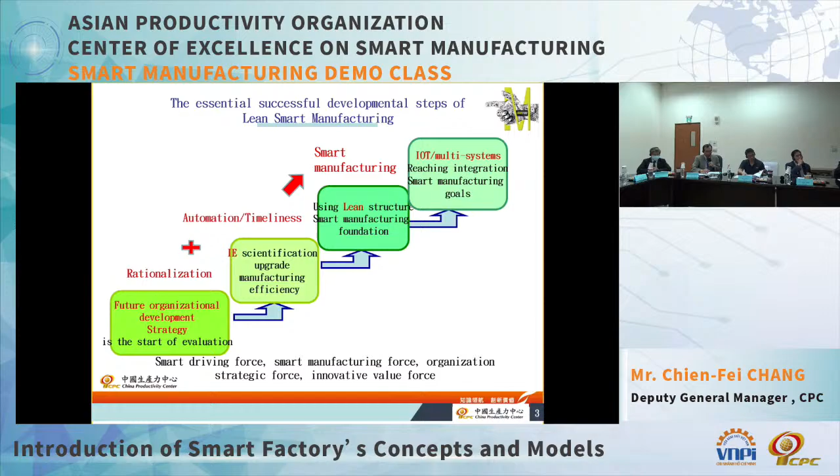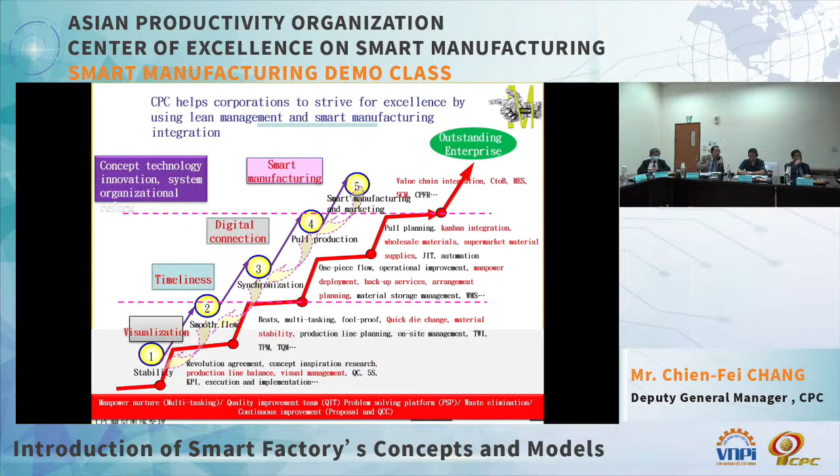In the past, we have had different progression processes all the way to IoT, and we could adopt a step-by-step approach. However, internationalization is taking place very quickly. So lean management, visualization, digital connection, all these steps should be promoted at the same time. We cannot have a step-by-step approach anymore. Particularly in the face of the post-COVID-19 era, facing confrontation between the US and China, we have seen very great changes in the market. So smart manufacturing should be promoted together with lean management.

We know that Dr. Hip was educated in Japan. He is very knowledgeable about Toyota-style management. So lean management actually was derived from Toyota's management style.

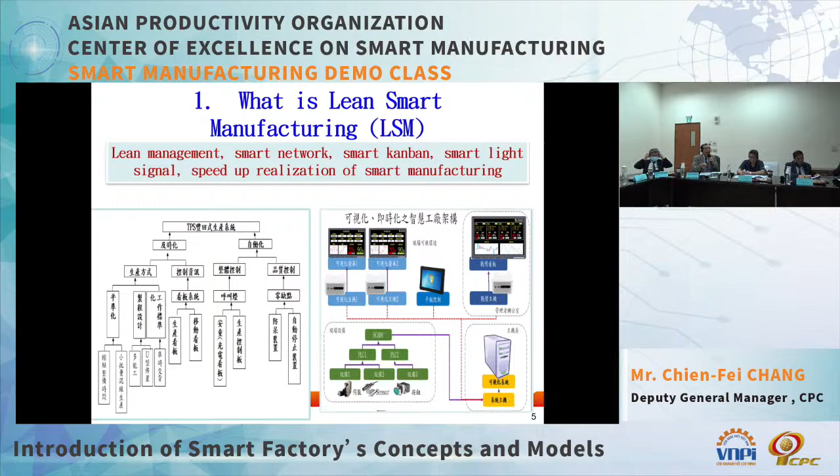And if you see the right portion of the slide, which is about the application of technologies for smart management of factories, under the efforts of CPC, we have aligned the objectives. We have set 6 major objectives. Like I said, Dr. Hip is a PhD. He obtained his doctorate from Japan.

The first is automation, and then visual management, and the second is real-time report, and the fourth is factory networking, and the fifth is digital combat information real-time response, and finally value connection operational innovation. Now, for the interest of time, let me give you the highlights of my presentation.

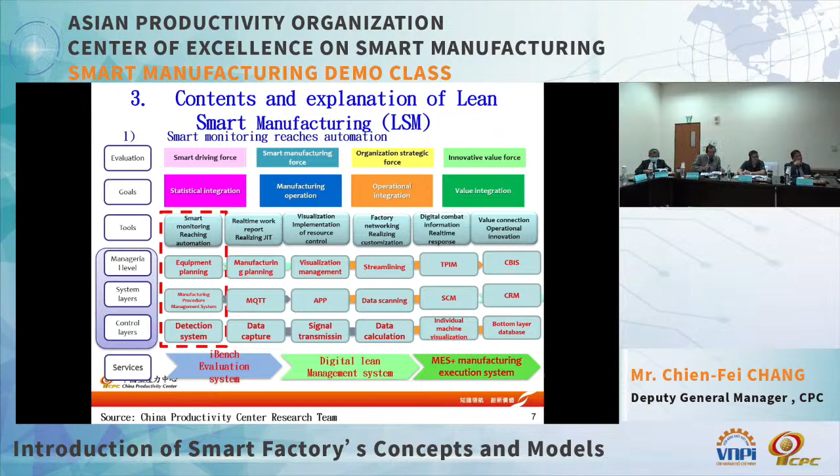Okay, so first off, I'd like to talk about visualization and automation. In the Toyota manufacturing system, autonomation is actually used in abnormal situations. That is, when an unexpected occurrence happens, the production line can immediately detect it and stop automatically. Therefore, you do not need highly skilled operators or skilled technicians to detect the error and save the production line from going into a standstill. This is automation, but the point is, how do we implement it?

In the Toyota manufacturing system, it was implemented in a more rudimentary manner. That is, they fixed the amount of input to that of the output. So that was the foolproof measure of the Toyota manufacturing system. That is, by introducing only the fixed amount of input and raw material, they'll be able to control the exact output.

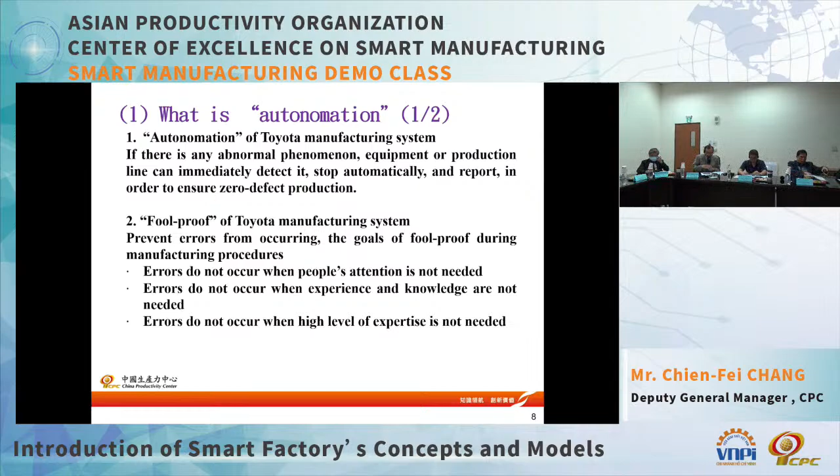And by controlling the flow, they will be able to measure the productions and the execution. I think this is something Dr. Hip is very familiar with, especially when he was working on his doctor's degree.

But how do we take this one step further? We wanted to combine this with smart manufacturing and smart machinery. Instead of using simply a measurement style to foolproof the system, we wanted to use sensors and other devices to assist us. If Dr. Hip can come to Taiwan, I'd be more than pleased to share with you our model and the actual devices.

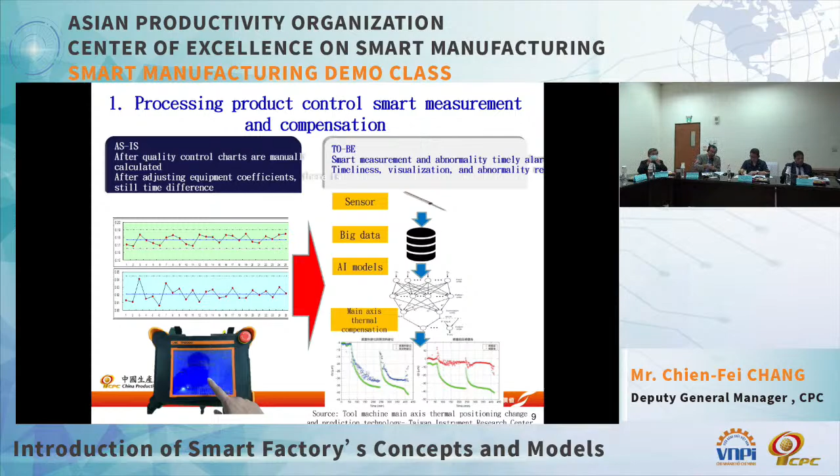In the past, we used a measurement model, but now we can use sensors to measure the dimensions, the vibrations, etc., and this will be like a real-time taking of all the measurements, able to replace the human effort. In the past, humans were required to carry out TQM, as in the Toyota manufacturing, but now we're actually using sensors and devices to replace the human effort.

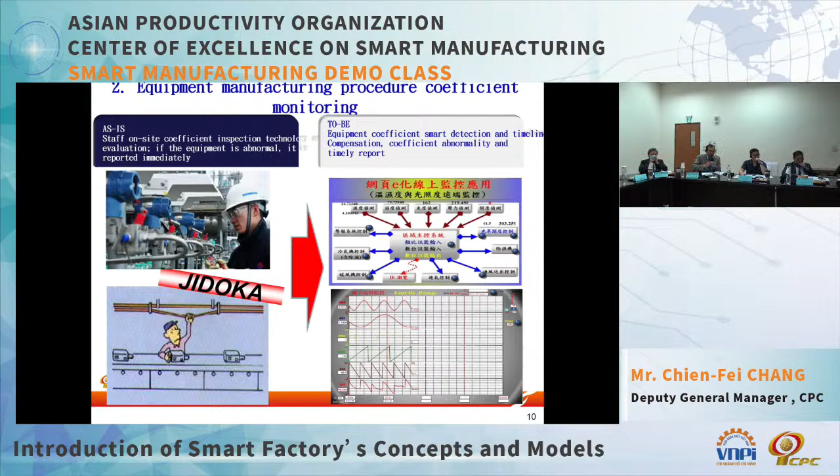And if the system detects any abnormal situations or anomalies, the system would be immediately notified and it can be dealt with right away. If you look at past practices, both Japanese and Taiwan companies used worksheets like this to note abnormal situations and errors. However, oftentimes these worksheets were filled in at the end of the day, and management would be able to learn about it only on the next day.

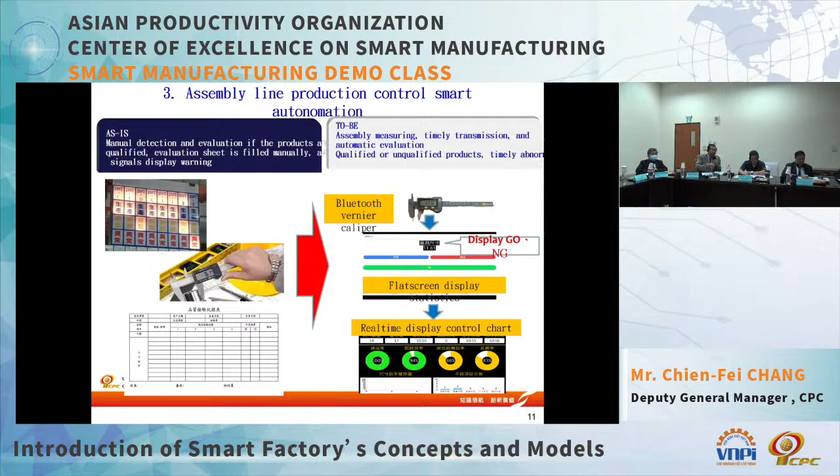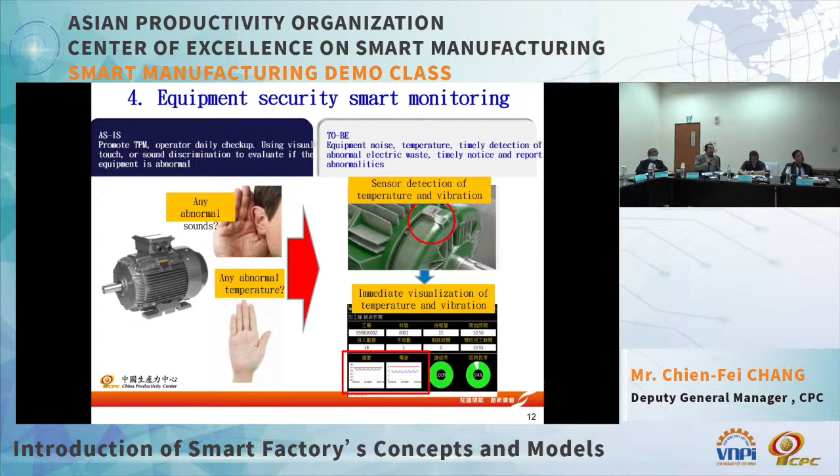So this would cause a time difference and a lag. But with the current system, everything is reported in real time, and there's no need to wait for people to fill in the worksheet and for people to submit the worksheets. So measurements we can take would include, for example, abnormal sounds, vibrations, temperature readings.

So how is this data presented? We call it the Kanban. Kanban is like Japanese for a dashboard. And we put this information on a Kanban, or a digital dashboard.

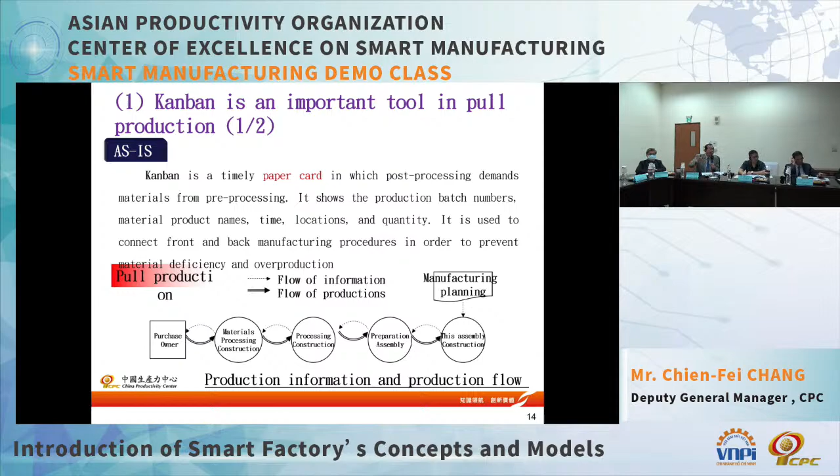From our observations, the information from the production line is often not readily seen. But with this Kanban, the management will be able to have a clear picture of the amount of raw material required, the amount of output that's currently being produced, and the current yield rate, etc. So the Kanban or the dashboard is where all this information is shown and where the management would go to find it. We call it a smart Kanban.

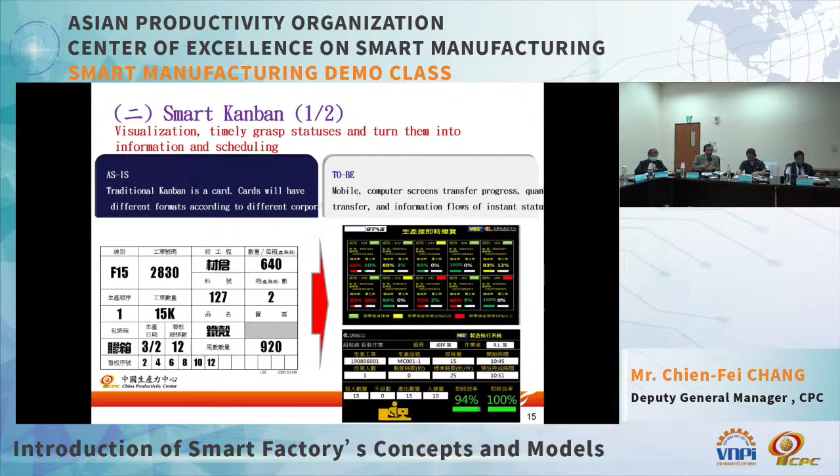In the past, it used to be on paper, but now we can put it on a screen. For example, this company is located in China, and this has already been implemented on the floor. The management would be able to see all the production lines' current status, including the work orders currently being processed, the amount of raw material required for each production line, etc. So this is the concept of a Kanban that's transferred from paperwork to a digital format.

So this is actually the floor of the factory, or the factory floor. We can call it like the storefront. And in the warehouse or the storefront, they would keep a record of the raw material. In the past, these were all detailed using paper cards. For example, people would remove different units of raw material and write down on the cards how many units were removed and how many remain.

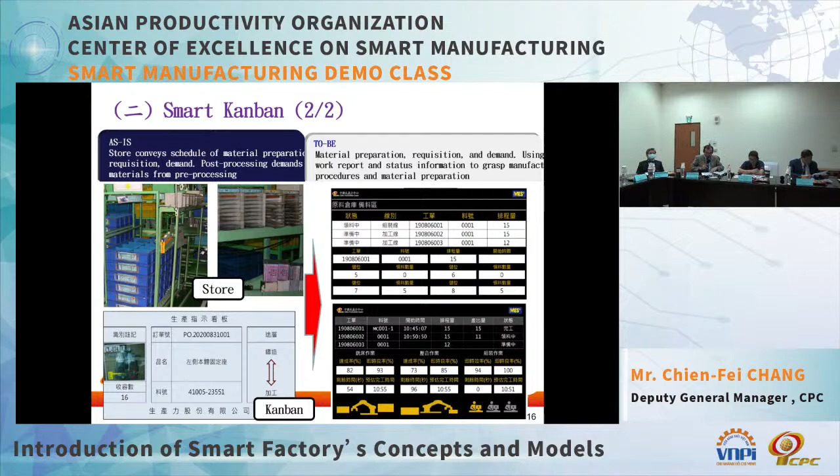But if we digitize it, then this can all be shown on the smart Kanban, and this would no longer require the workers to input it manually. So for the smart Kanban concept, I would like to make a comparison here on this slide, between the traditional Kanban and the smart Kanban system.

Now, the traditional Kanban system is actually quite ingenious, as they did not have this technology at that time. So they used different management processes to manage and make the production flow more efficient. But now with new devices, first, for example, we can now visualize the entire manufacturing process, and the amount inputted and the amount outputted would all be recorded by the system.

The dashboards or the Kanbans can also be mobile, and the workers and management can use access cards to access the information.

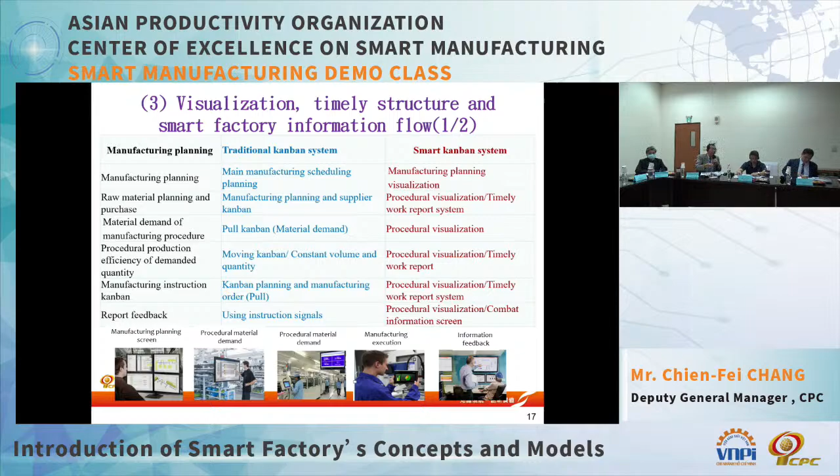And these Kanbans would then actually show the information that's required. Next, I'll talk about the visualization implementation.

The Toyota system actually mentioned 7 areas where waste could occur. For example, excess production waste, or waste that occurred when waiting, transport, etc. These are the 7 areas where waste might occur.

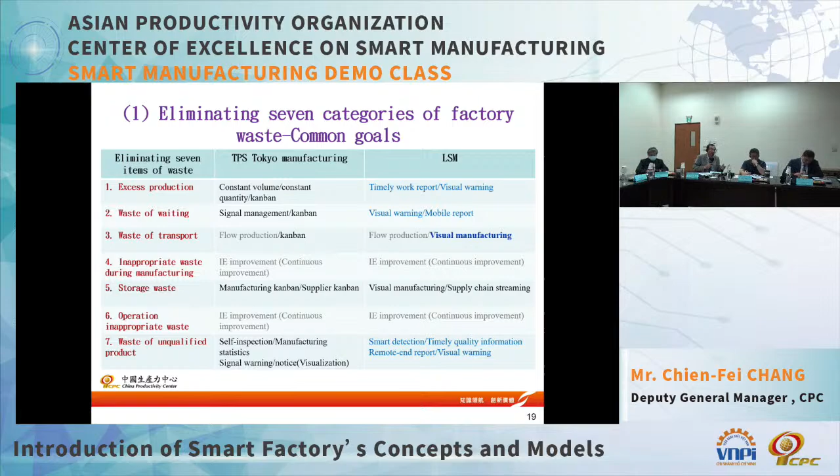In the traditional TPS system, we have traditional methods. To prevent excess production, they use fixed volume, fixed input, and fixed output methods to control this. For example, to prevent time wasted when waiting, they use light signals to manage the production line. For waste in storage, they would also use a manufacturing Kanban and a supplier Kanban. But these can all be included and shown in the smart Kanban when they are digitized.

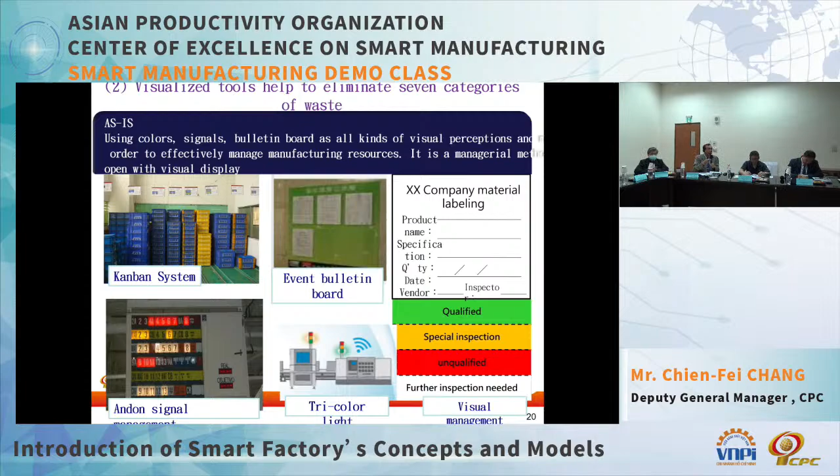If you look at the picture on the left, you would see the Kanban system in a Japanese factory at work. They're in paper format, and the information can easily be shown on a bulletin board, but it's still in paper format. On the lower left, these are the light signals that would tell the workers and management whether there's a shortage of raw material and whether production is going on fluently. But as you can see, this would still require a significant amount of human labor to record and relay the information.

We'll also be able to immediately detect the yield rate, and if a production line is more prone to making faulty products, we can pinpoint the situation and look into it. This would translate into higher OEE, since the utilization rate can also be easily shown and analyzed. We would also be able to integrate the work schedule of the workers more easily with this system.

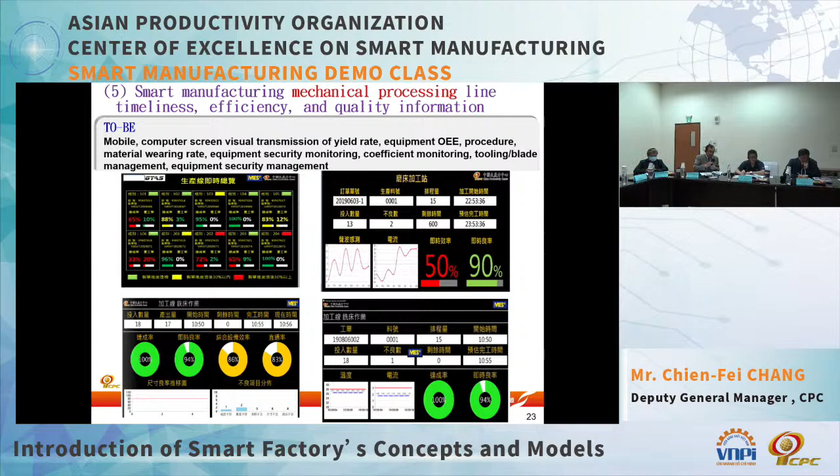The system can also be shown on mobile devices. Management will be able to understand the floor directly on their mobile devices. I think what's most important is to prevent waste in human resources, raw materials, and time.

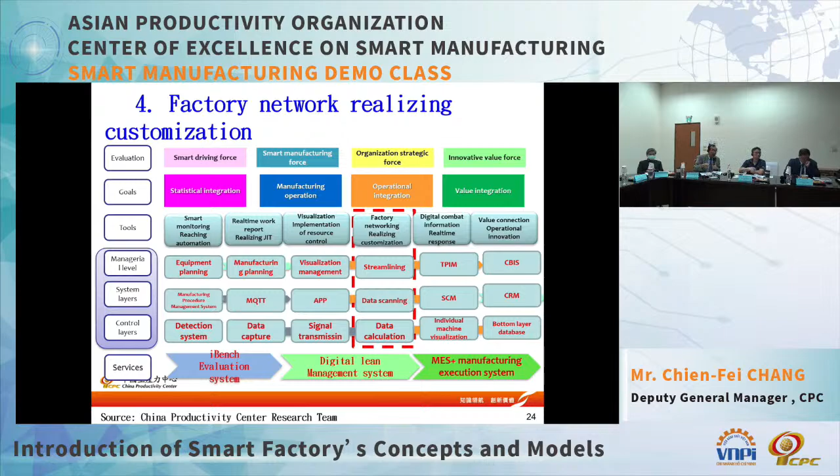Next, I'd like to talk about the factory network. We've been talking about Industry 4.0 for quite a while, and we talked about 5+2, and now we're talking about digital transformation and digital optimization. So what exactly is digital transformation? Basically, this refers to a linkage between the supplier and the demand side, and the purpose, of course, is to create customized products.

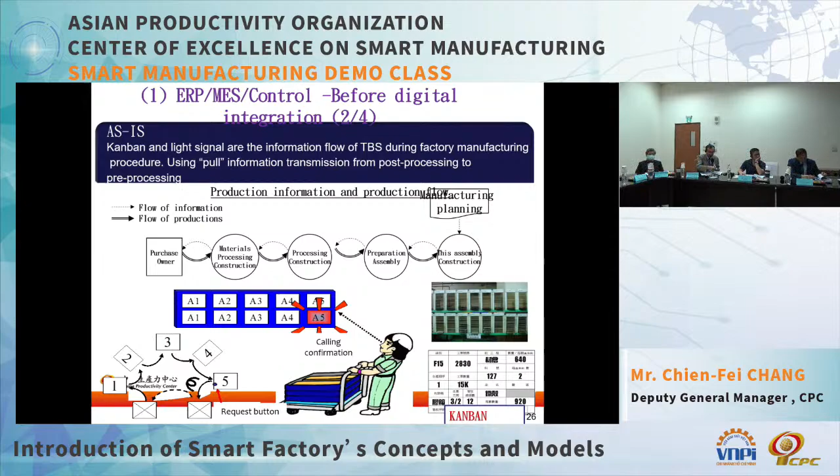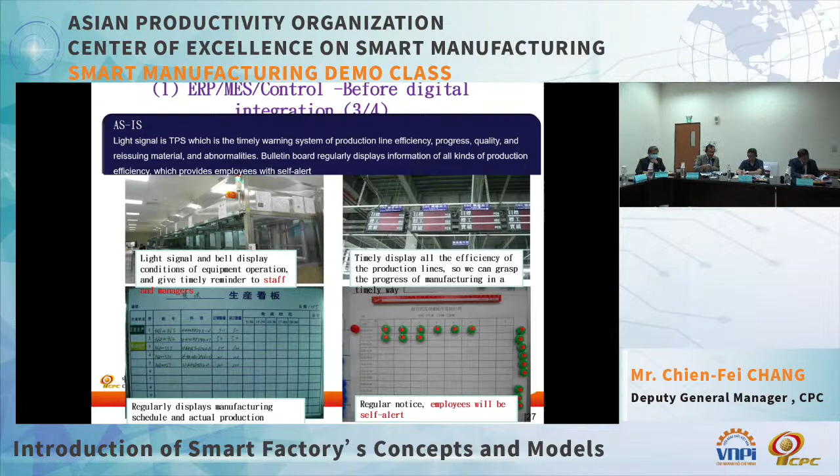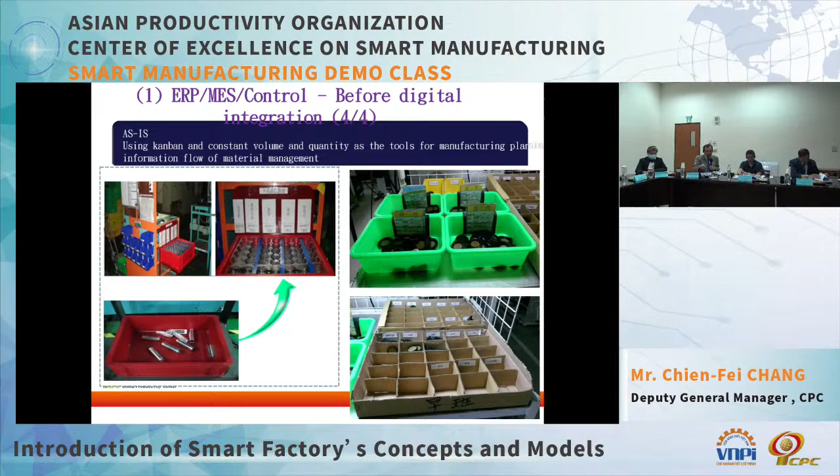I think I've shared this with our Vietnamese friends in the past - the ERP and MES linkage system. This can be used to replace the traditional Kanban system that relies on light signals to relay information. The upper right shows the Kanban box, a management system used by Japanese companies in the past. In these pictures, the information is recorded on the whiteboard by hand. The light signals and bell signals show the current status of the production line. That's the traditional Kanban system, used to collect and relay information.

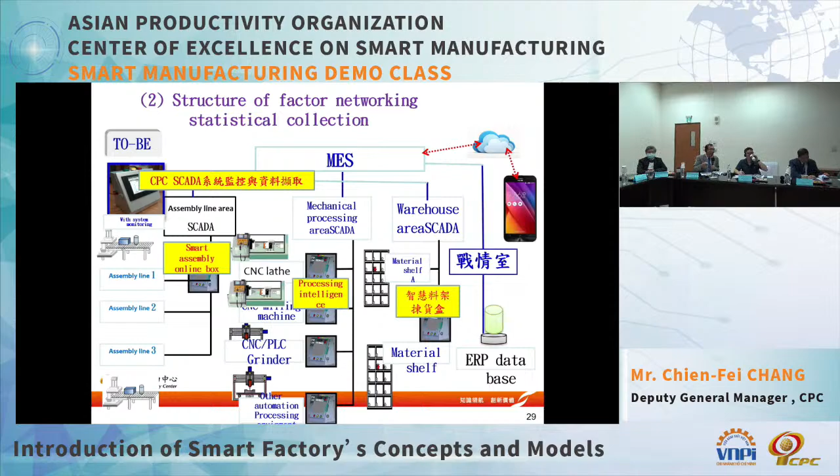But nowadays, we talk about using set-top boxes and on-site devices to collect the information and transmit it through the SCADA system into the MES. So for the linkage we're currently talking about, our aim is to be able to trace each and every work order.

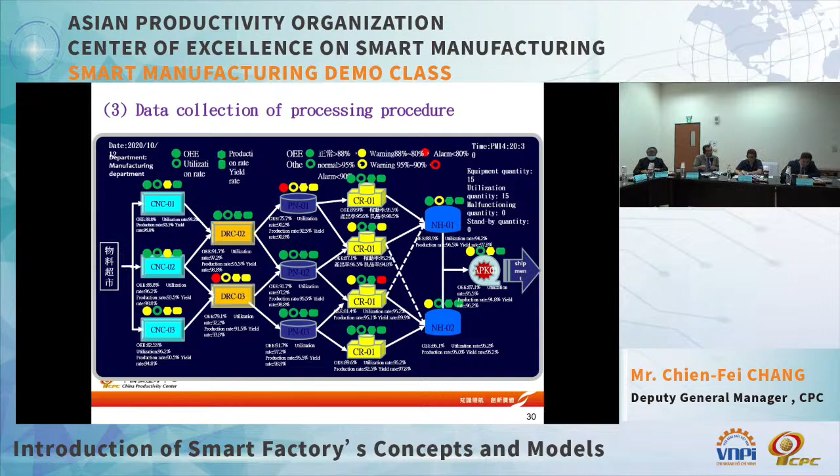For example, if we have work order 01, we will be able to trace the current status of the work order. For example, if it's currently at DRC02, we're able to trace whether the work order is fulfilled or not, and combine it with the ERP, the operating system, the equipment system - everything will then be interconnected. So in this way, we can set up a comprehensive networking system for our equipment.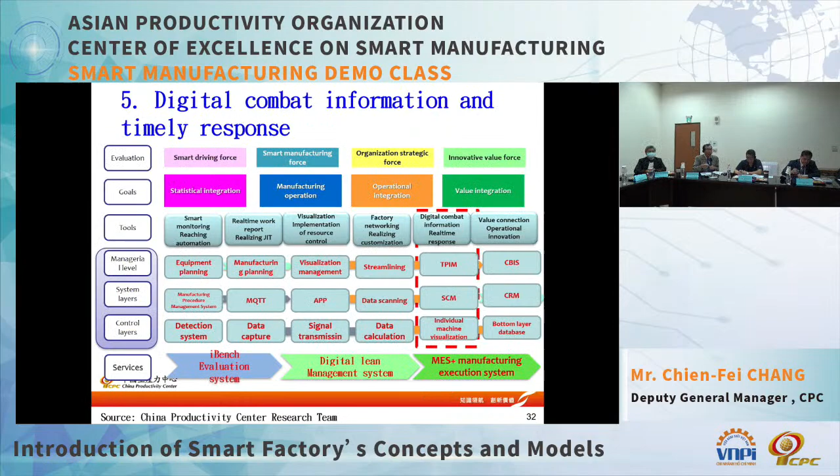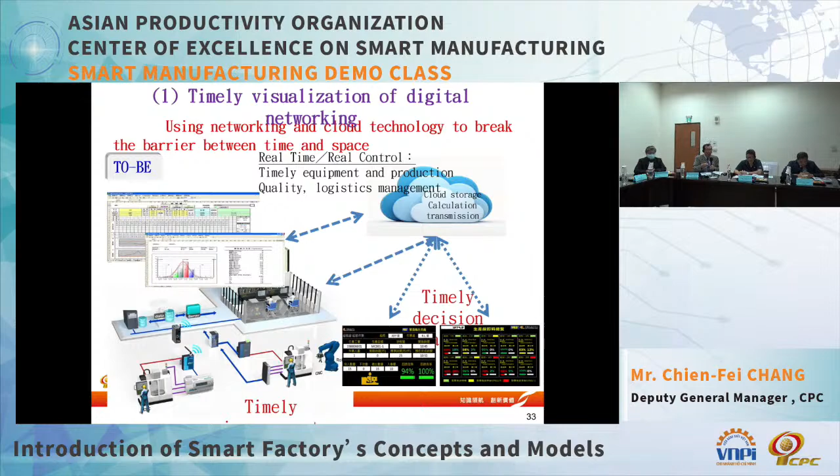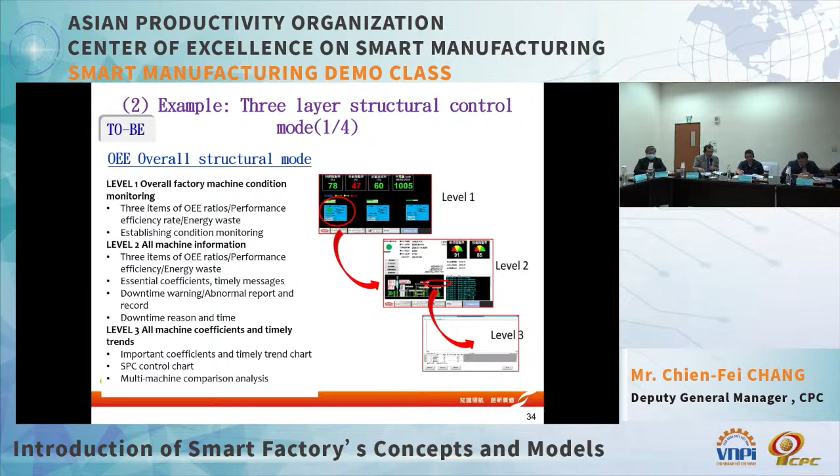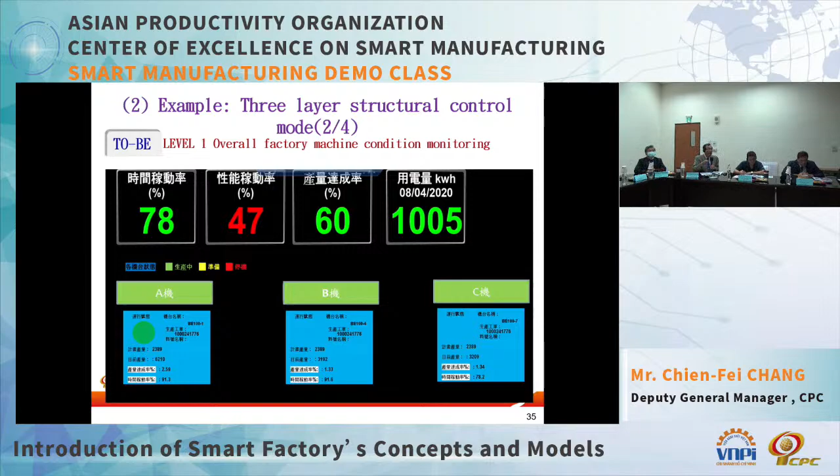Now, for visualization of digital networking, we want to be able to monitor the on-site or production situation remotely. Let me give you an example: I have equipment on the remote side. We have level 1, OEE level 1, level 2, or level 3. For level 1, it means that for a factory, we can understand the overall factory machine condition. We can monitor the overall situation. I can understand the utilization rate currently.

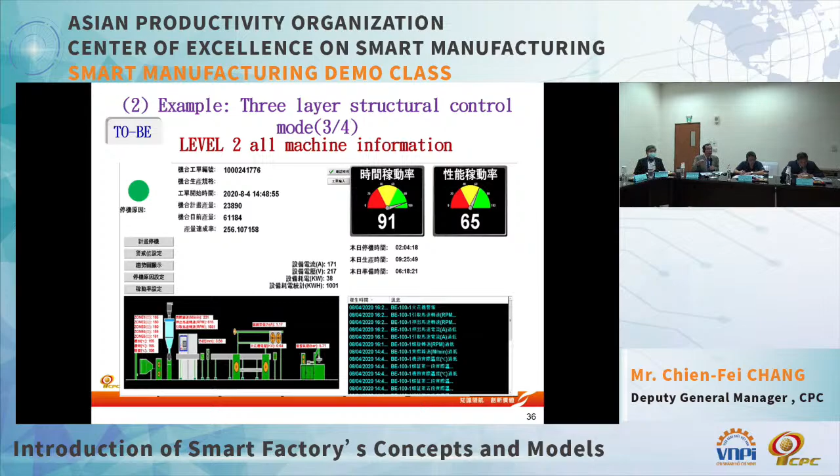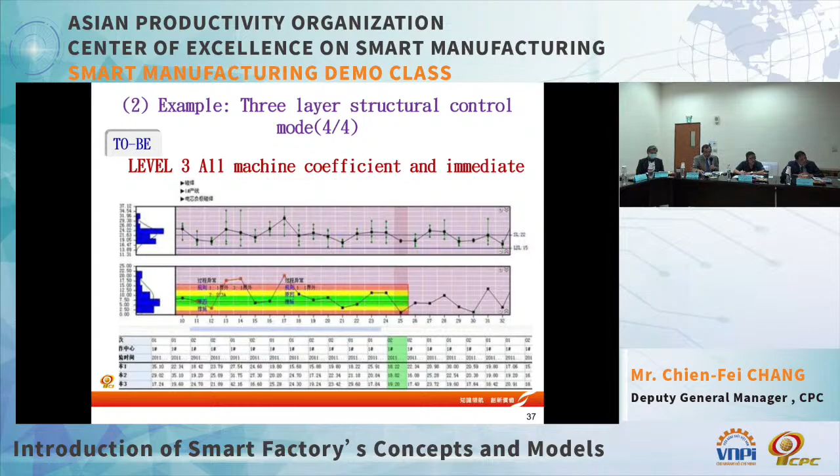For level 2, it means that I have information about the status of every single machine, its utilization, its performance. Level 3 can monitor all the parameters so that the machines do not have any defective products.

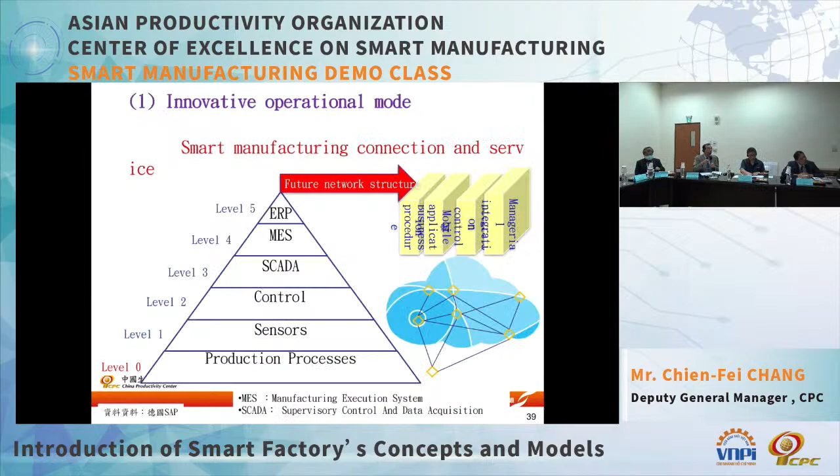Now I'm going to talk about something that is currently being discussed in Taiwan: C2M or C2B. What's C2B or C2M? What does that mean? That is, there should be a connection between commercial and business aspects, initiated by the customers. In the past, products needed to go through branded companies, manufacturing, importers, transportation, shipping, all the way to wholesaling and retailers.

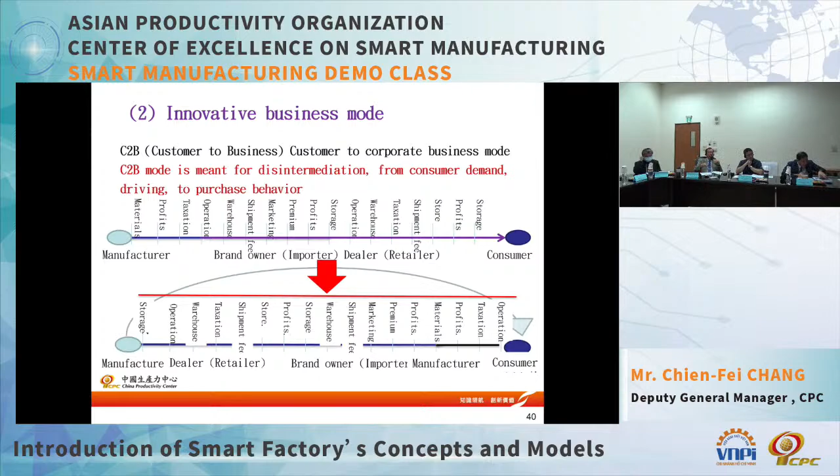According to my experience in providing consultation services to companies, I know how prices are quoted for mass customization. The production should be linked with the customers, and the process has to be initiated by the customer. So we need to decentralize, remove intermediaries, and provide sufficient information. Networking is also very important, and the commercial and manufacturing aspects have to be perfectly linked.

In order to do that, we need to focus on the people aspect. We need to consider the taste of consumers, and the customers should have very clear information. We also need to understand the consumers.

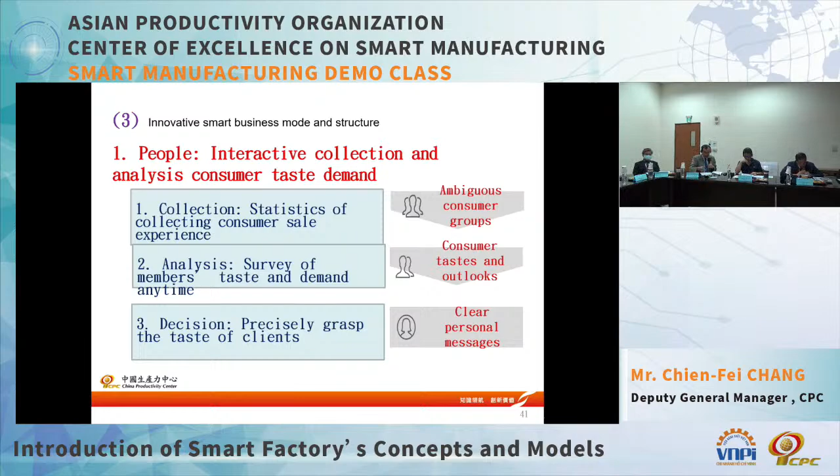In Taiwan, we help a company that manufactures dresses for girls, and I think it has greatly customized its operation. For apparel business, different people have different dressing styles, whether they prefer pockets, sleeve styles. You need to understand the basic information, the patterns, and the color needs of the users.

And then we can figure out ultimately whether laces will be needed in the end products, and whether buttons and pockets are needed. According to our experience, this kind of information is very important.

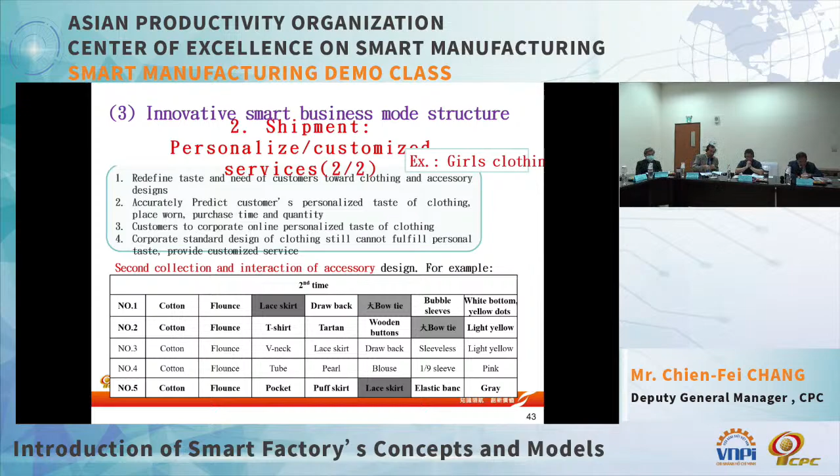However, in the manufacturing process, you need to prepare materials, engage in production, and the products have to be delivered to the consumers, because the consumers may need the dress in time, for example to attend a wedding. So we need to deliver the products to the customers in time, and address that aspect as well.

In order to achieve that, I think we need to pay attention to distribution, and to the process from online to offline. If information is not shared between e-commerce and physical stores, then you don't have an integrated distribution channel, but rather diverse channels that are not integrated.

I'd like to come to my conclusion. When it comes to digital technology, I think we need to link the manufacturer with different aspects of business operation.

During the pandemic, I think Dr. Hip and I had exchanges through Line. I told him that during the period of time we cannot travel overseas, the CPC's consultants, including Mr. Lin...

In the future, I think we will present smart Kanban or smart dashboards to help enterprises embark on the journey of smart manufacturing.

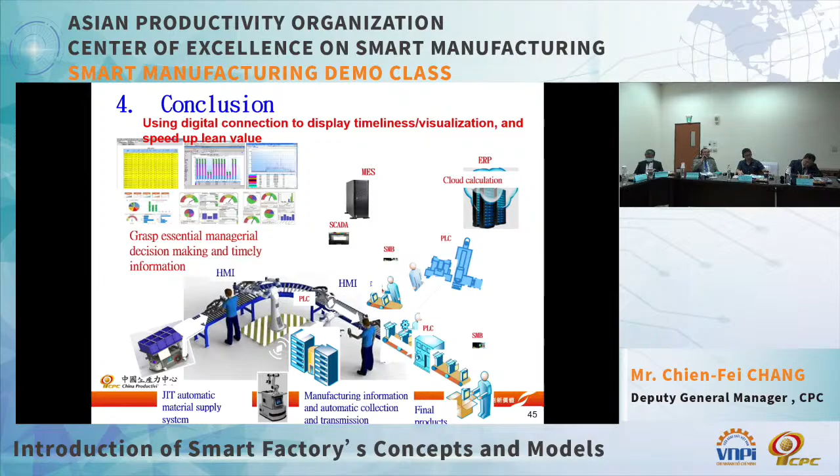If you have money, you can buy smart factories. However, smart manufacturing involves integration of many different manufacturing elements in order to succeed.

That concludes my presentation. Thank you, Deputy Manager, General Manager Chang, for your sharing.

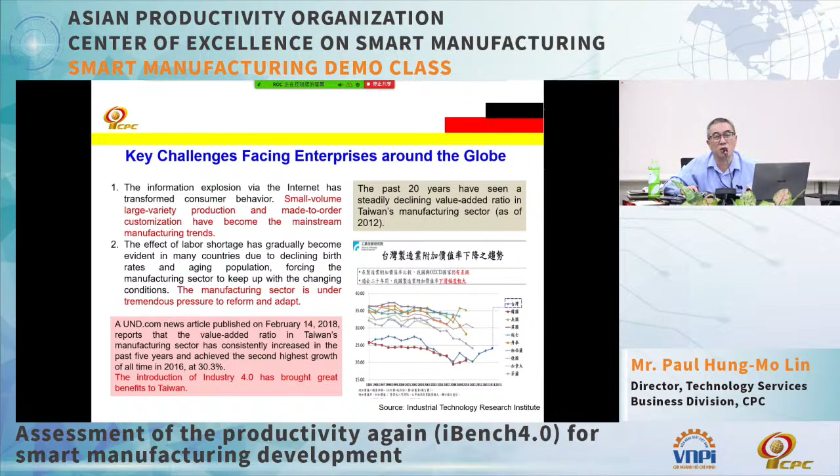Now, this slide is about the key challenges facing enterprises. For example, more varied orders for smaller quantities, and that's the current situation.

Before 2025, you can see this kind of trend, and that's why we developed this tool in order to accommodate the needs in the future.

In the beginning, when iBench was launched, we considered Industry 4.0 in Germany. It involves the setting of production plans, and we try to promote some international standards.

There are 6 dimensions for the Industry 4.0 readiness indicators in Germany. There are 6 dimensions.

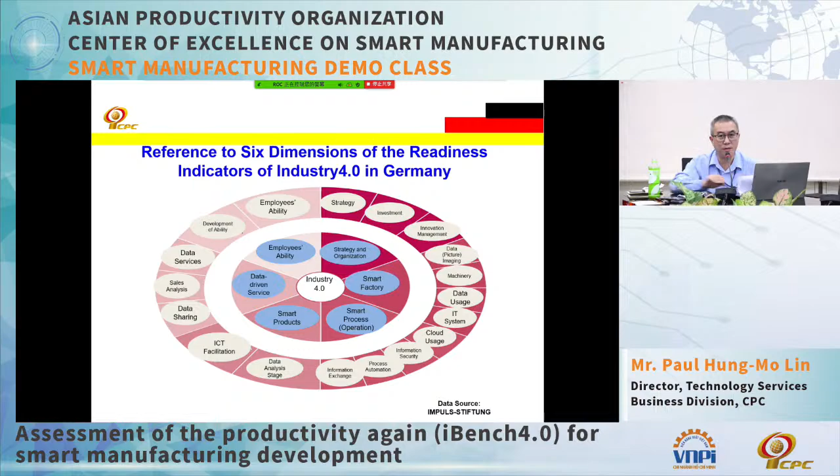I know that my presentation is very lengthy. Maybe I can only cover the first part of my presentation. I have more than 40 slides, so maybe I can only cover the top half or the first half.

Now I'll talk about the readiness assessment. Actually, I have 2 colleagues sitting next to me. Last time on September 23rd, during the APO event, this topic was shared as well.

I also understand that many member states are very interested in iBench. If you want the presentation material, the organizer, Deputy General Manager, will provide this presentation material after the meeting.

There are 4 dimensions I'd like to talk about. The first dimension includes organizational strategies, the second is smart manufacturing, the third is drive for smart technologies, and the fourth is innovation value.

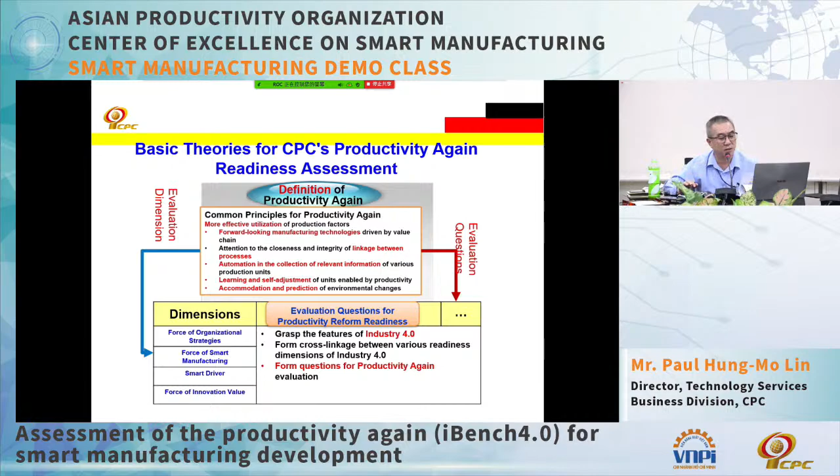Now for the participating part, some of you may have heard about this before, but that's fine. We hope to gradually promote this. So maybe VNPI can try out our platform in the future, and I'm going to provide my contact information in my email, so if you need to contact me, you know how to reach me. I hope that you can also try out this platform.

Let me introduce the dimensions of our assessment. Regarding the first dimension, which is organizational strategy, it has four components. The first is visionary leadership. The second is strategic planning and operation management and human resource. It's part of organizational strategy.

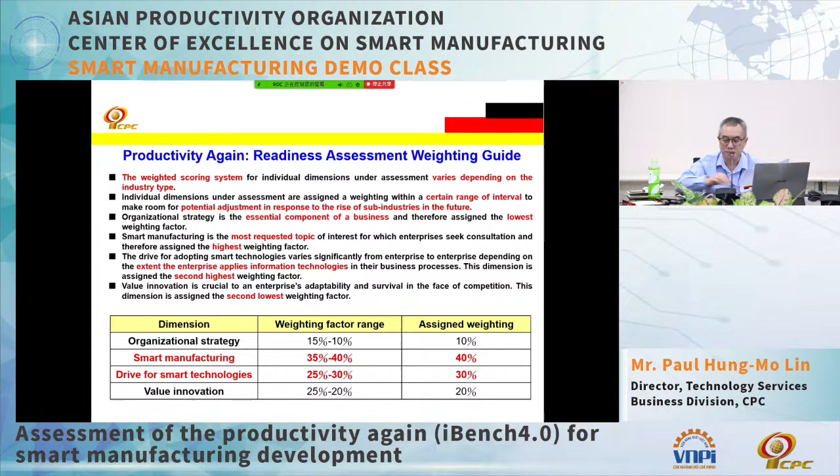So if we come to this slide, you can see that during our design, we also changed the weighting a bit for each dimension. For example, for organizational strategy and value innovation, we've assigned 10% and 20% respectively. The two center dimensions, smart manufacturing and drive for smart technologies, would be the key components of iBench, so you would see that we assign them a higher weighting of 40 and 30% respectively.

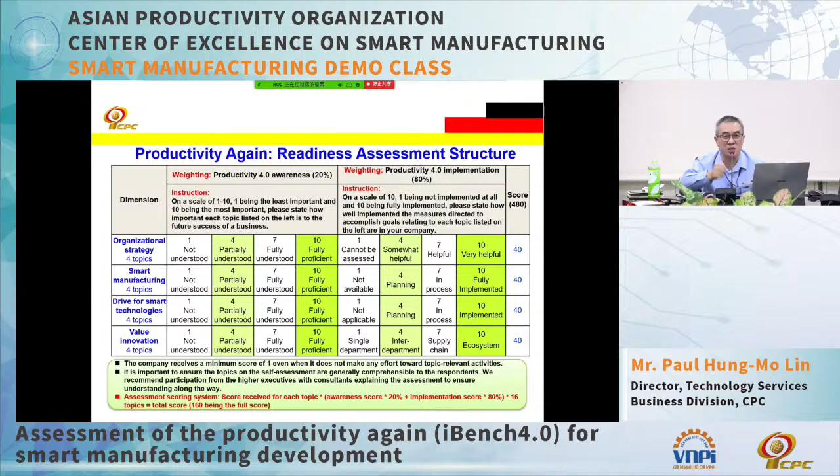So for each dimension, we have the operational definition, and you can see that the operational definitions are given on level choices 1, 4, 7, and 10. If the company picks 1, it means it's not understood. If it's 10, it means the company is fully proficient in this ideal concept, with 4 being partially understood and 7 being fully understood.

So in the online assessment, the user can simply move the bar to select the levels from 1 to 10. What I'm showing is the iBench in Mandarin, but we have already translated it into English now, so if you log into the website, you'll be able to see it in English.

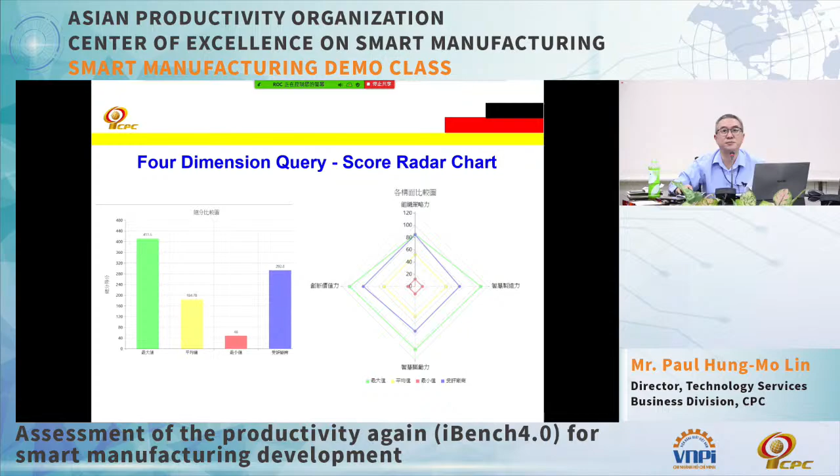What's unique about the assessment is that you can immediately see your current status compared with others. If you look at the graph on the left, you'll be able to see your current standing compared with others who've also taken the assessment. For example, you would see the leftmost bar being the maximum score received currently in the data bank. You will, of course, not be able to see which company it is, as all the names have been removed for the sake of confidentiality. But we will be able to get, for example, the maximum score, the minimum score, the average score, as well as your score, which would be the bar on the right.

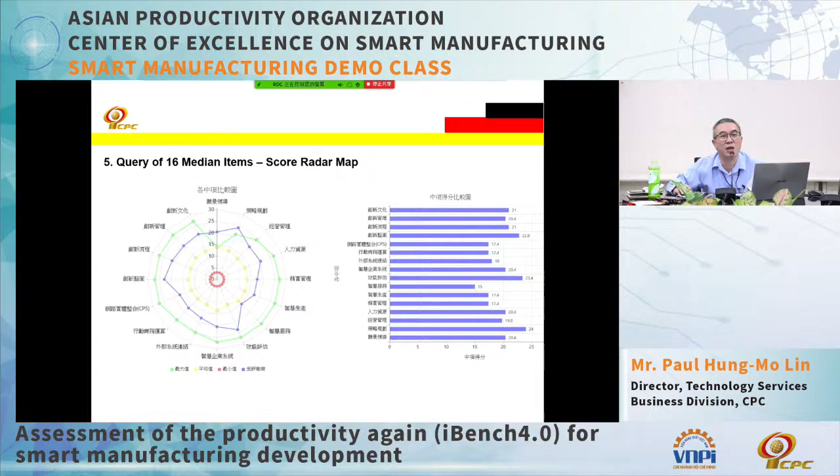Here we have a radar chart that maps out all the scores in each dimension, and this gives the company a better idea of the areas they are doing well and areas that may need more improvement. You can also check out the comparisons with other companies on the radar chart. We would also be able to get a ranking among all the companies that have taken this assessment.

As I've already mentioned, you would not be able to decipher which company the data belongs to, as we've removed all the names in order to preserve confidentiality. Finally, we also have a readiness reference indicator to give you a straightforward score in terms of Industry 4.0. This is used as a reference and can create easy buy-in from the company side.

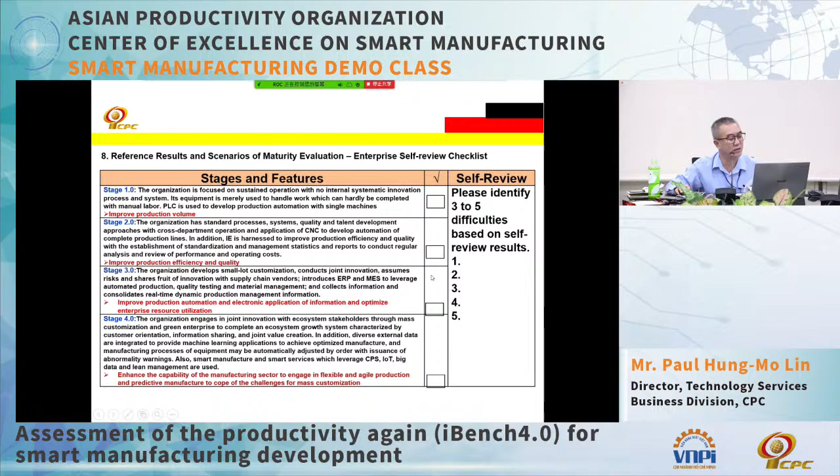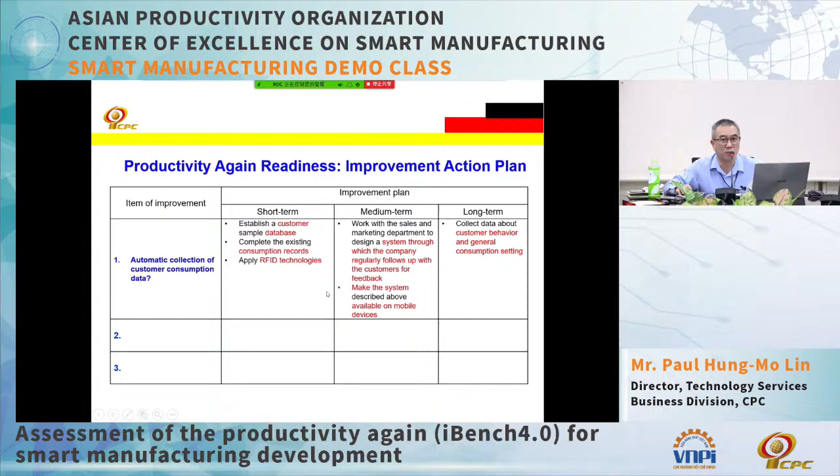We would also have readiness levels, but in stages. The company can take this to assess its current standing. This is just a follow-up. Once the scorecard has been filled in, the company can fill out action plans based on short-term, medium-term, and long-term projections.

We also have some additional reference material for you regarding the tool itself. I would be skipping these pages in the interest of time, but if you have any questions related to these following pages, feel free to contact us. We will be pleased to provide answers.

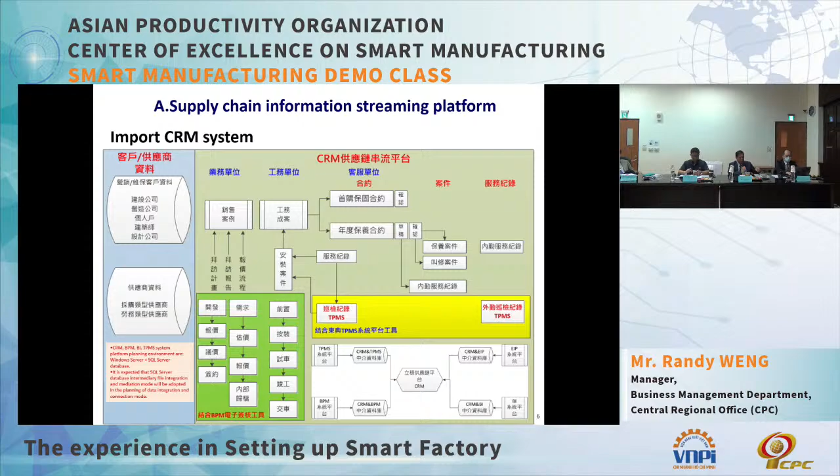For the system involving the maintenance of elevators, we can use such a system as a tool. Through the tool, we can gain a comprehensive understanding of all the service or maintenance records, and they will be quite visible in our system. And then we can check the history of the customer's elevators by looking at the past maintenance records and the past failure records of the elevators.

And now I'd like to introduce the BI system. It's a modular system. Through AI technology, we can incorporate the elements of our choice. I talk about the black box. Through a black box, the information can be sent to the CRM system, and then we can also use our AI and our BI tools. Through our algorithm, we'll be able to create an overall enterprise situation room. And this is quite important for managers and operators and owners so that they can make relevant decisions in the future.

Regarding the B element or the B portion, under the category of A, I just talked about various pertinent tasks. Now I'd like to talk about category B. We want to introduce a control concept of system. In the past, we didn't do this.

It was not easy for us to control quality and also the process parameters and quality measurement parameters. We could not obtain the information on a real-time basis. That's why it was difficult for us to optimize the process because the data we had were not accurate, and as a result, it was more difficult for us to control quality. Also, a lot of information was noted down on paper by employees, so we had a lot of paper-based information with a lot of manual operation. Sometimes the information is inaccurate or omitted, and it's impossible for us to have an integrated system due to a lack of information, and we were not able to address irregularities on a real-time basis.

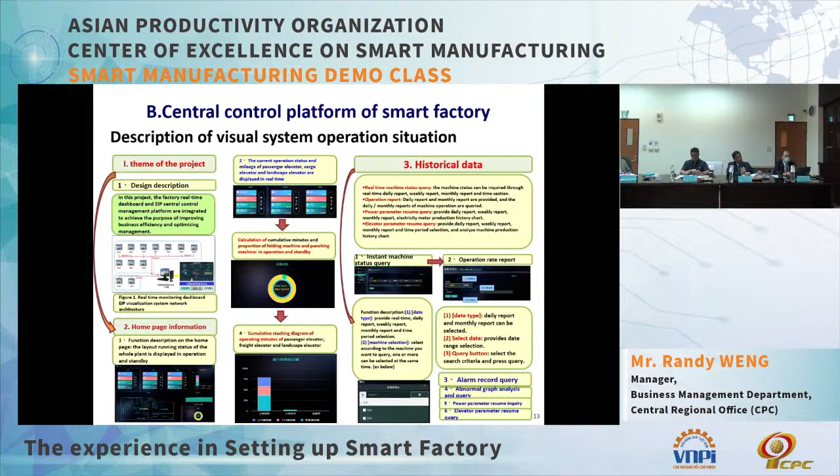You can see that there are 3 elevators, for example a passenger elevator, 1 scenic elevator, and 1 freight elevator. You can see the number of minutes of operation accumulated over time. You can also see historic records, and then come up with charts for statistical and analytical purposes.

This depicts the concept of a dashboard, and we can provide a dashboard like this in a situation room for the manager and owner to understand the current status of the elevator's operation.

We're talking about elevators. Elevators need to be maintained. In the past, oftentimes we relied on a lot of paper, a stack of paper, and you need to check item by item in order to ascertain the status of the elevators. However, the paper materials are heavy, and also the inspectors, in the course of checking, oftentimes do not keep very accurate or detailed records.

As a result, the maintenance records of the elevators are not comprehensive, and it's very difficult to pass down information from one inspector to another. As a result, elevators' safety will be compromised.

We hope that through the use of mobile devices such as tablet PCs or smartphones, our maintenance personnel will be able to use a tablet PC or smartphone to check the safety of the elevators at the customer's end.

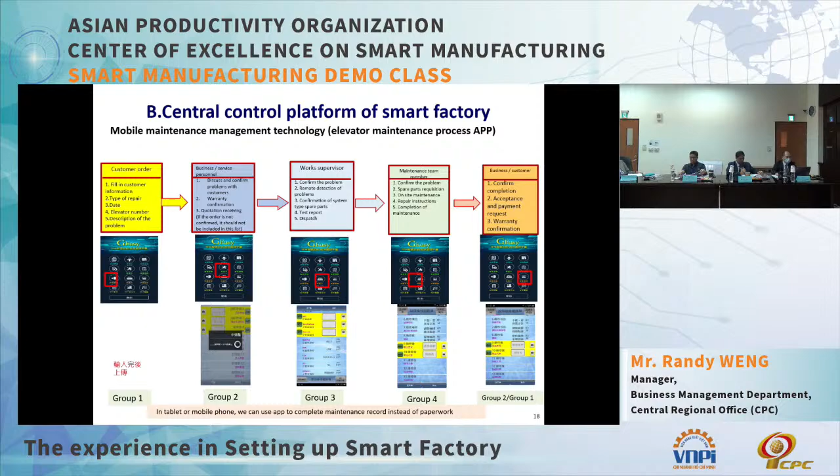The technician or maintenance staff would no longer need to carry with them a huge stack of paper records when they perform the maintenance, and this actually would make them look more professional, as everything can be immediately checked on the tablet.

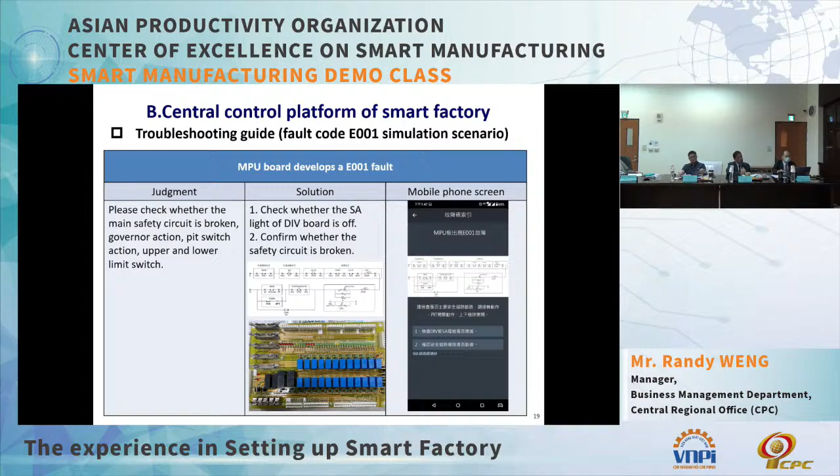So, to give you an example, if the MPU board actually develops an E001 signal, then the judgment would first be made, and the ways to resolve this would also be shown. This can actually be seen on the mobile phone directly, and this is the same for other types of errors.

So as mentioned, elevators actually need to be safe, and therefore health inspections also need to be carried out for elevator systems, as we do for the human body.

The elevators have a black box that collects data during its operation. For example, this would include the upline running time, downline running time, the operating time of its brakes, frequencies, brake contactor times, opening and closing times of the interior doors, electric current, voltage, temperature, and other electrical properties and data.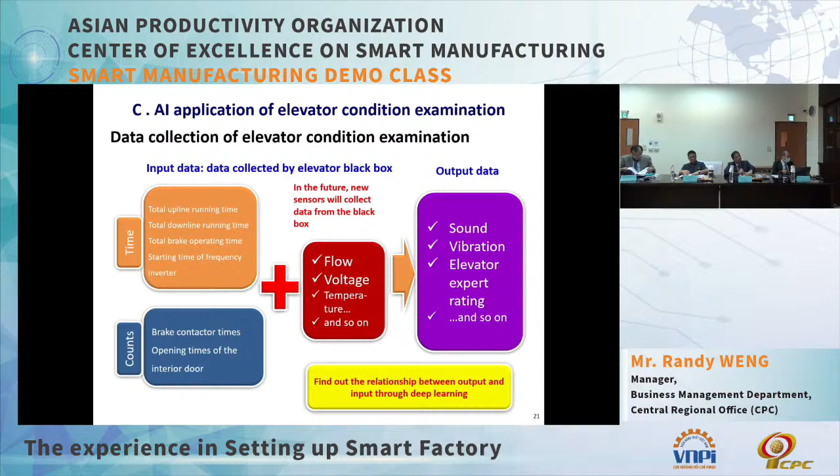This would allow technicians to analyze the current status of the elevator based on the collected sound and vibration data. If the elevator is still looking good, then that's fine. But if there are suspicious areas, a quick check or on-site check can be scheduled and performed to ensure the safety of the elevator system.

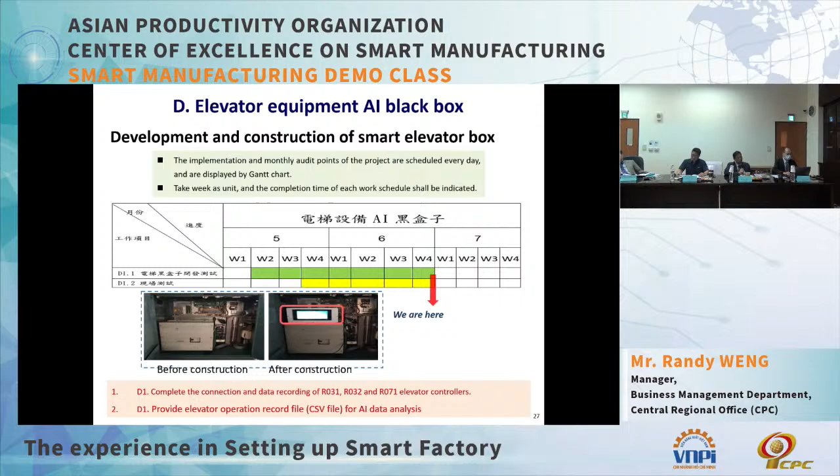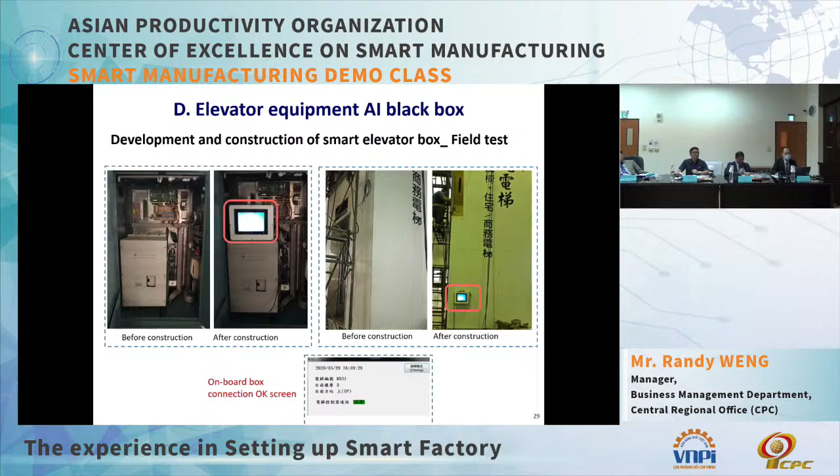This is a picture of the black box that we installed in the elevator system. And this is a diagram we'll be pleased to share with you showing how the elevator system was upgraded to include the black box.

Here we have elevators for passengers and for freight, and the different setups. But of course, we've also made changes to the factory floor.

We also saw the issue with long transport distances in the factory, and by simply rearranging the workstations, we were able to resolve this.

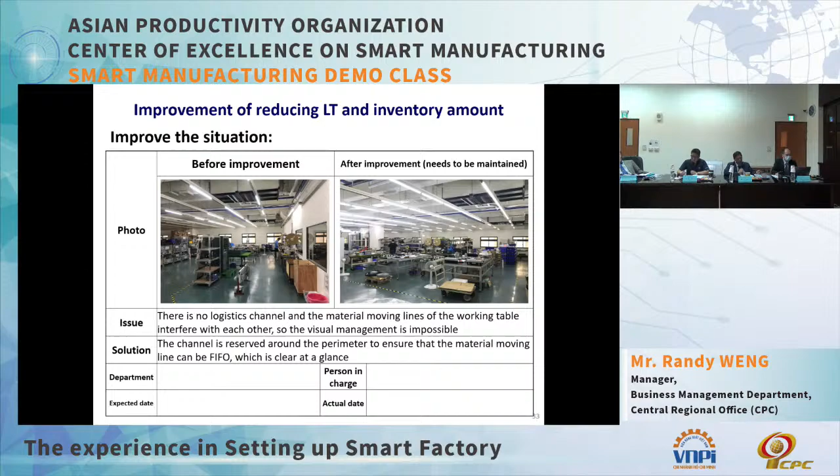This is the basic 5S management that we did for the company on the factory floor level. For example, keeping safety distances and making sure that the gangways and corridors are free of clutter.

And with this, I would like to conclude my presentation. Thank you very much.

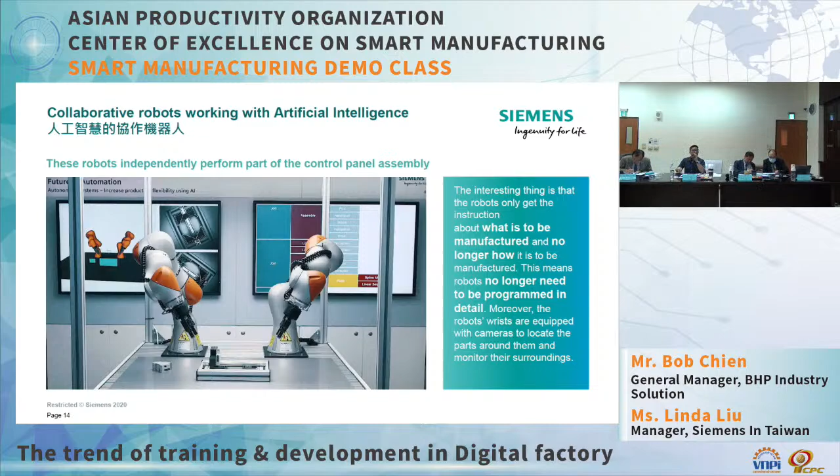So take Siemens for example. How do I achieve this kind of autonomous handling system? A very important idea is that we need to make sure such equipment can be integrated with the upper layer source of information. This is what we call vertical integration of OT and IT. OT means operation technology, that includes all operating systems.

OT can be understood as all the hardware equipment that you can see, even a sensor or a brake is still a piece of hardware. All the way up, the tool or the machine is still hardware, so that's called OT. And the data generated by OT are provided to IT, which is information technology. It's more like software knowledge.

So the data from OT should be delivered to IT, and this process is called MindSphere at Siemens. MindSphere connects different domains. If you have a lot of equipment, regardless of what the equipment is, the most important thing is that the equipment should be network capable. And in the course of networking, you need to achieve a high degree of cybersecurity. After the equipment is network connected, you need to consider how subsequent services can be provided, and this is something you need to pay attention to in the networking process.

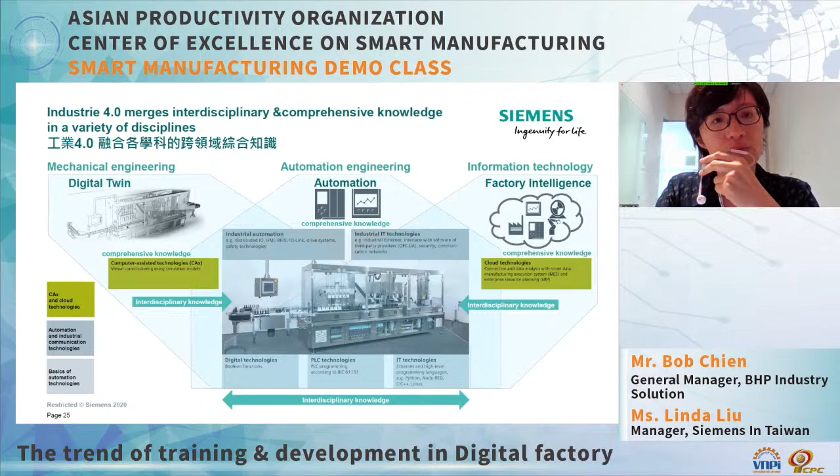So over the years, when we talk about Industry 4.0, including schools and different entities, they want to understand whether there is a systematic approach to train Industry 4.0 talents, from mechanical engineering, automation engineering to IT. We need systematic integrated programs covering different domains, covering basic education and training, all the way to second level understanding in communication technologies. They need to be able to understand how to leverage communication technologies so that they can have a better understanding of cloud-based technology.

Currently speaking, on the academia or training institute side, what they want to know about is how to cultivate these talents, and that these talents are indeed what the industry needs.

So for our work in cooperation with academia, our hope is to have students here in Taiwan truly understand what the industry is doing and what the industry needs. So we are working with the government in consolidating and integrating the type of education that we are providing students. We want to give students a taste of the industry while they're still at school, so that they have a better understanding of the talents required and the type of expertise they need to cultivate.